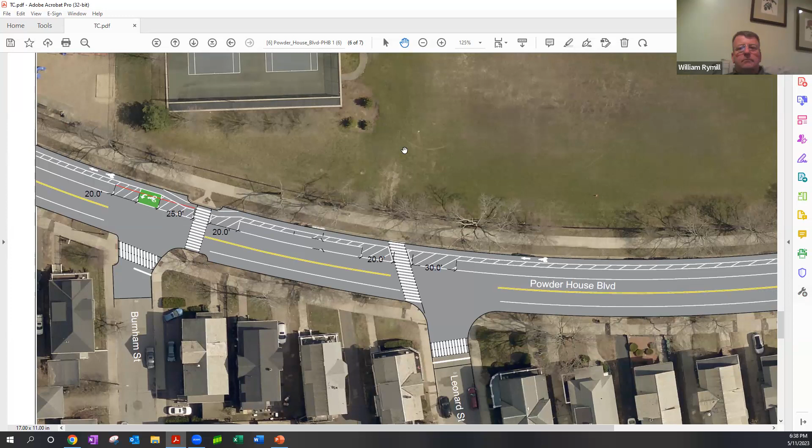In this location, we're asking for an additional 40 feet on the far side of this crosswalk, in addition to the 20-foot distance from the crosswalk. The primary reason for that is to add a bicycle box for left turns. Again, we have a very long stretch where the bike lane is behind parking, where there are no gaps to get out essentially. So this is to make sure that people who are biking can turn left onto Burnham Street, and it provides a space for them to wait. That impacts approximately 2 permanent parking spaces.

Moving on to the next item, regarding the curb on the north side of Powder House Boulevard opposite Mason Street, request to convert approximately 50 feet of permanent parking only to no parking anytime. That's this entire section here. There are no crosswalks here currently, so parking would normally be permitted along this entire section.

It's the same reason - to have a space for people biking, turning left, and we don't want parked cars right up against that space, because when someone is in the bike box waiting, we want them to be visible by traffic moving in each direction. That impacts approximately 2.5 parking spaces there.

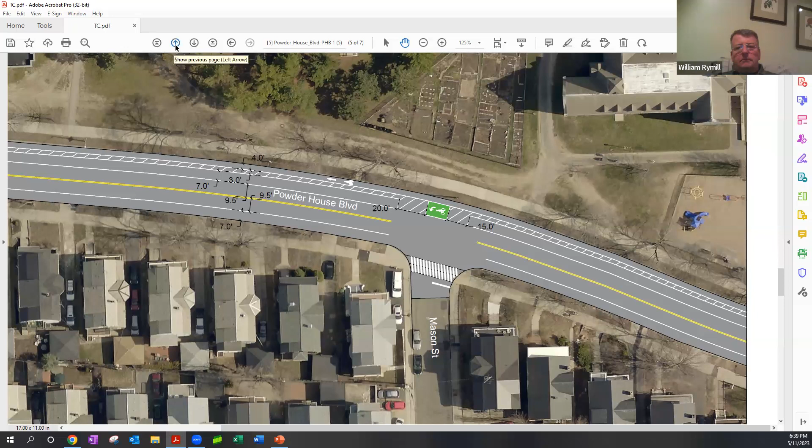Part D of this item is right up at Packard Ave. This is where the protected bike lane ends, and this is where it turns into sort of a standard bike lane next to a lane of parking.

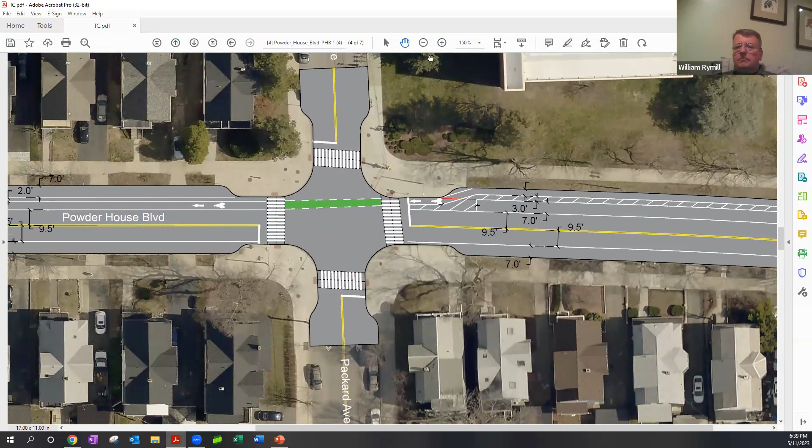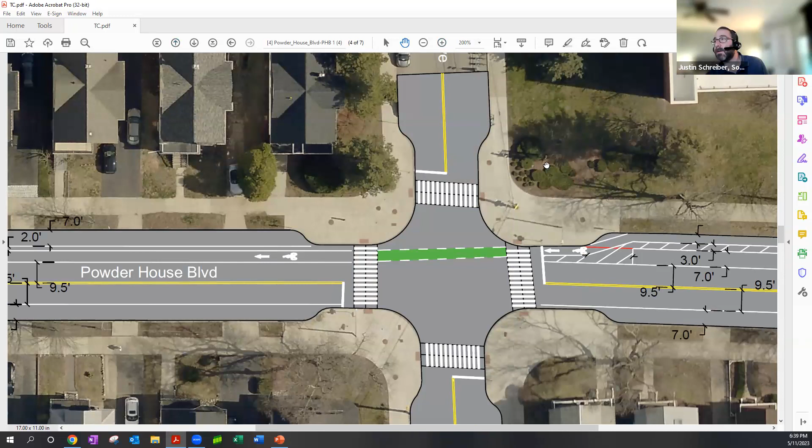This reads regarding the curb on the north side of Powder House Boulevard from approximately 40 feet east of Packard Ave to 50 feet east of Packard Ave.

Request to convert 10 feet of permanent parking only to no parking anytime. So the 10 feet we're talking about, zoom in a little more. This shadow is the no parking here at a corner sign. To make enough space for this bike lane transition, we're extending that another 10 feet to where you see the cutout for the parking lane. So today parking is permitted up to the sign, and the 10 feet is to extend it.

Again, on a stretch this long with no driveways or curb cuts on this side of the street, this really has minimal to no impact on parking capacity.

And that is it for item 6. Happy to take any questions.

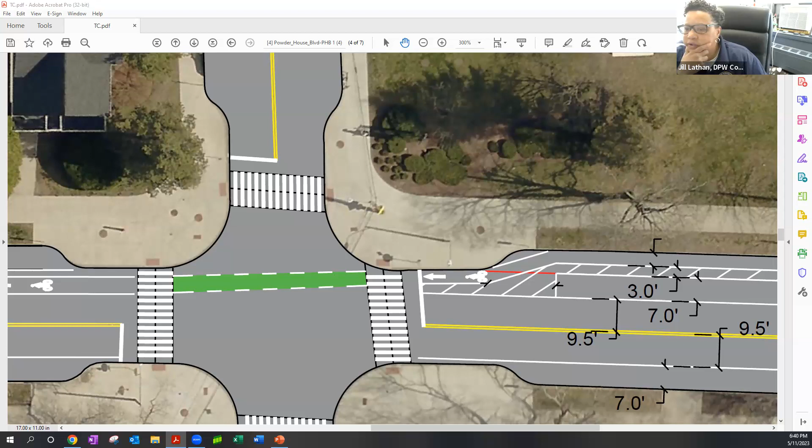Great. Discussions from the committee? So I have one question.

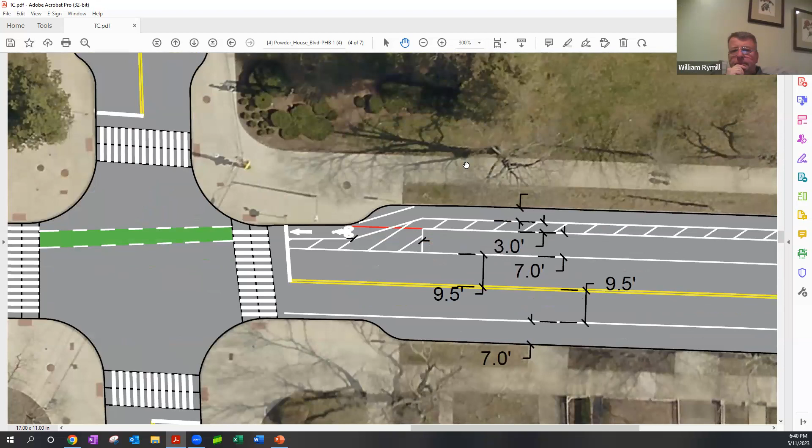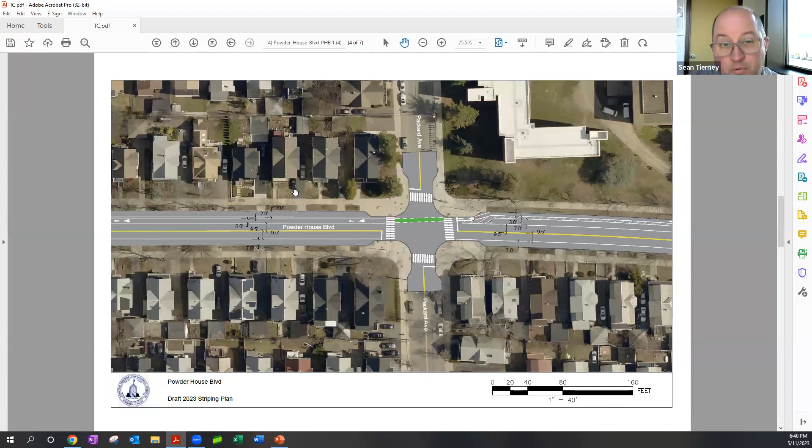It's not fire related, but is it necessary for the 2 left-hand turn lanes and giving up parking spaces for Burnham and Mason Street? Is there numbers to justify the number of people going up? Mason Street is, as you know, a pretty good hill. Are people really going up that hill versus going down Burnham, the next street over?

Just a thought. We don't have traffic data for bike left turns here. I think our thought is if there's a place where bikes can legally go left, that we should provide a way for them to do so. So that's what's reflected here.

And how many spaces do we give up by the 2 of those? This one is about 50 feet, so it's 2.5, I guess, but it depends how you measure. I think it's probably closer to 2, just because on a stretch this long of parking, people aren't necessarily parking nose to nose. So the extra 10 feet, we usually estimate approximately 20 feet per space. So it's between 2 and 3, but I think it's more likely 2 spaces.

And what's the distance between that left turn and the other one we made on Burnham? It's 1 block, probably about 300 feet or so. So in 300 feet, we're losing 5 spaces? 1, 2.

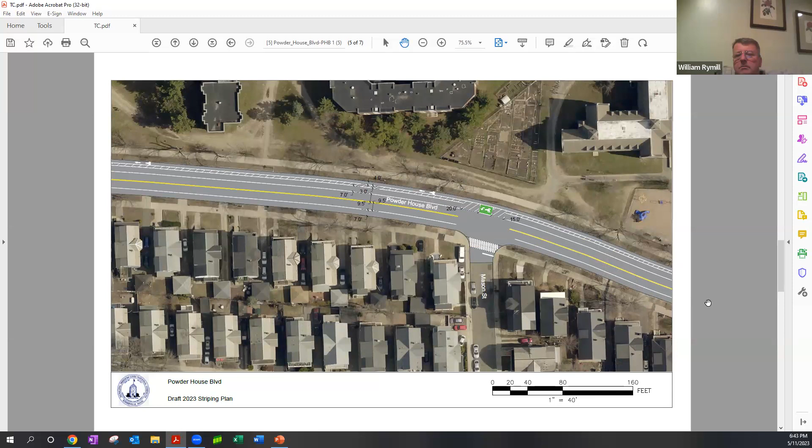Hi, Chair Lathan. Through you, just mostly a comment. I think it probably would be closer to 2 spaces, just because cars are really big and tall, and every time at every corner and intersection when the parking is restricted, and as I believe it is actually city policy for at least crosswalks, it's the same logic. That's a wide street, and if someone's going to make that left turn, you really don't want that person to be turning right in front of your vehicle, coming out of nowhere. I think a lot of the times it's like, oh, pedestrians and cyclists, people smaller than cars come out of nowhere, but a lot of that is because of that visibility issue. So I do support any time when a vulnerable road user like a pedestrian or a cyclist is going to be hopping out from behind large parked cars, that it makes sense to have a little bit of space so that they're visible. So I do see the logic there, and I feel like it's a reasonable amount of space to give to that safety feature.

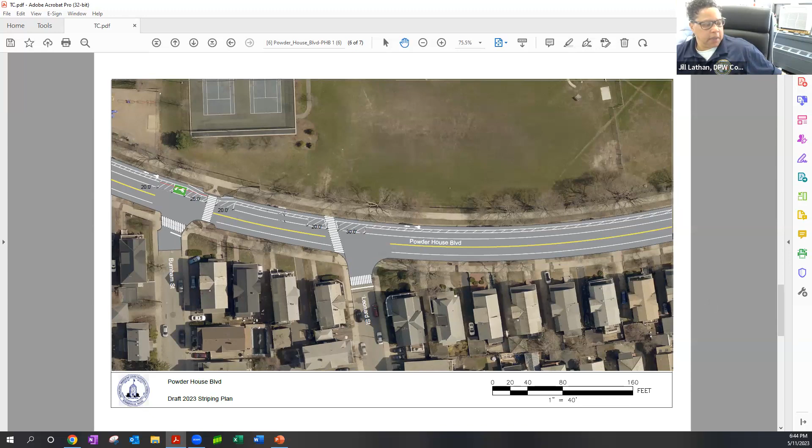Any further discussion? Hearing none, may I get a motion to accept or reject item number 6, A, B, C, and D?

I'll make a motion to accept. May I get a second? Timmy? Sean, can I get a second? How about you, Lieutenant Rymill? Can I get a second? All righty, all right, cool. Wonderful.

Roll call vote, please, to approve item number 6. Councilor Gomez Moacad, yes. Lena Webb, yes. Lieutenant Rymill, yes. Deputy Chief Tierney, yes. That's 4 yes and 1 abstain, and the motion carries.

All righty, moving on to item number 7. This is a marathon one for us tonight, committee members. East Broadway bus lanes and crosswalk improvements, A, B, C, D, E, F.

This seems to go on further. The Broadway South Side, McGrath Highway to Mount Vernon Street, that's G, H, I, J, K, L, M, N, O, P, Q. And on to Cross Street, north of Broadway, R, and Franklin Street, south of Broadway, S and T. I'm kind of disappointed we're not getting to Z this evening.

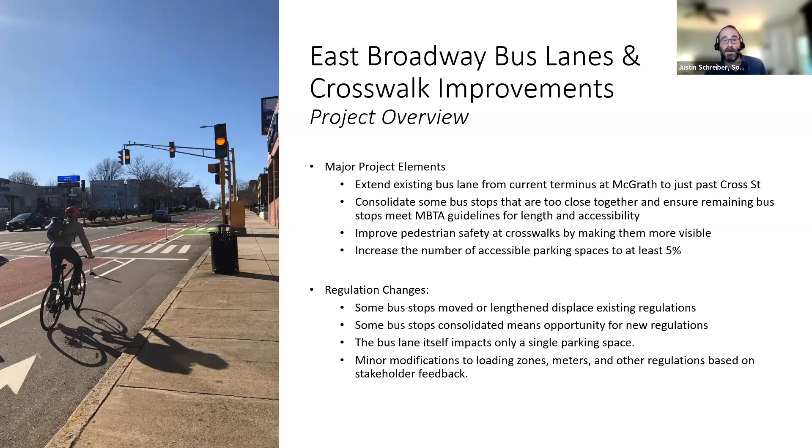And then, based on the feedback we've heard from residents and businesses along East Broadway, there are changes to loading zone meters and other regulations based on that feedback. So the main thrust here is the bus lane, but it's also an opportunity to make sure things are working well for the business district as well.

Here's a quick overview of the bus stop changes. The pair at Cross Street East: the westbound bus stop heading away from Sullivan Square will remain the same, though a little longer. The eastbound location heading towards Sullivan Square in front of Joe's Liquors will be moved a bit further upstream on Broadway between Cross and Autumn Street.

At Indiana Ave and Michigan Ave, the two westbound bus stops heading away from Sullivan Square will be consolidated to a single, more centrally located stop at Illinois Ave. At Glen Street and Franklin Street, the two eastbound stops heading towards Sullivan will be consolidated to a more centrally located stop across from the East Branch Library on the far side of Glen Street. Finally, the MacArthur Street and Kensington Ave pair is proposed to be removed entirely, as they would end up extremely close to other bus stops here.

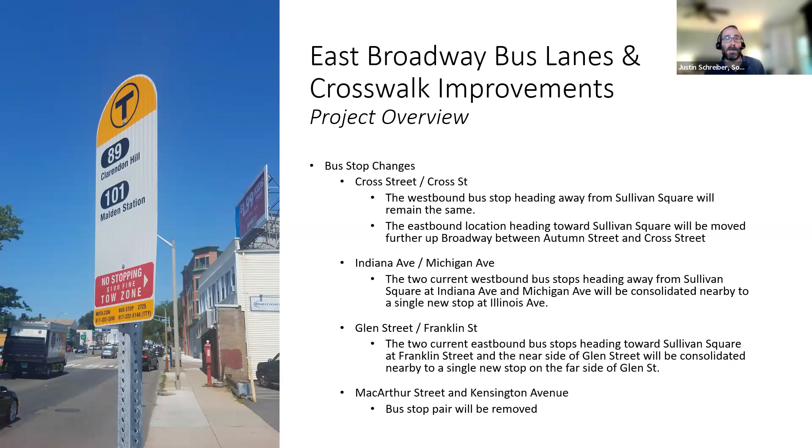A little bit about the outreach we've completed so far. We've had 3 on-street pop-up events: at Broadway and Cross Street on March 30th, at the Somerville Community School, and at Broadway at Franklin Street. We estimate we spoke to over 200 people at those 3 events.

We also had virtual office hours, not as well attended, but two chances for folks less comfortable talking in person or who wanted a one-on-one with a city staffer, on March 28th and March 19th. We've been partnering with Somerville staff to speak different languages when talking to East Broadway businesses, particularly important in East Somerville. We've had assistance from East Somerville Main Streets and Economic Development in getting the word out to different businesses.

Our digital and print outreach materials are available in all of our most commonly spoken languages in Somerville, and we also did direct flyering to residences near the bus lane itself. We've established a project website, again available in 6 languages, and are getting the word out through various newsletters and social media accounts.

A couple more things we'd like to do, assuming a positive vote tonight, as we pivot toward implementation. We have individualized flyers for each bus stop that's changing to show people where they need to go, relying on pictures so it's understandable by many different people.

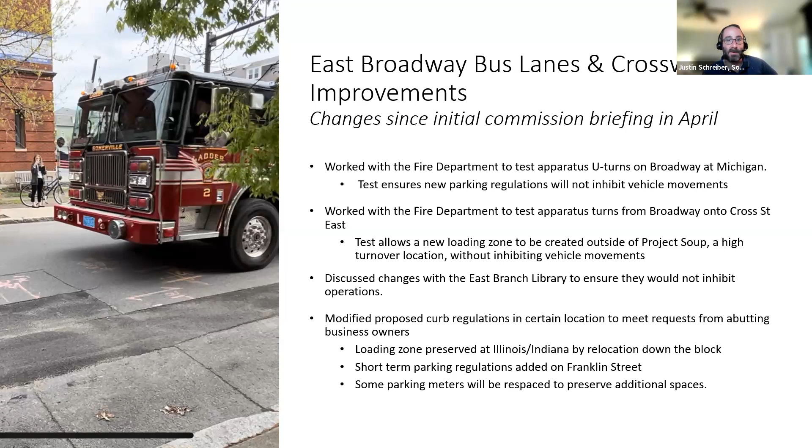Quick illustrative overview of the bus lane. Essentially we're taking that secondary travel lane between McGrath and Cross Street and reserving it for the bus in both directions. Parking is to the right of that bus lane, the other travel lane is to the left, and we're preserving all of the left turn lanes that exist today. After approximately Rush Street, the bus lane ends and merges into a single travel lane on Broadway.

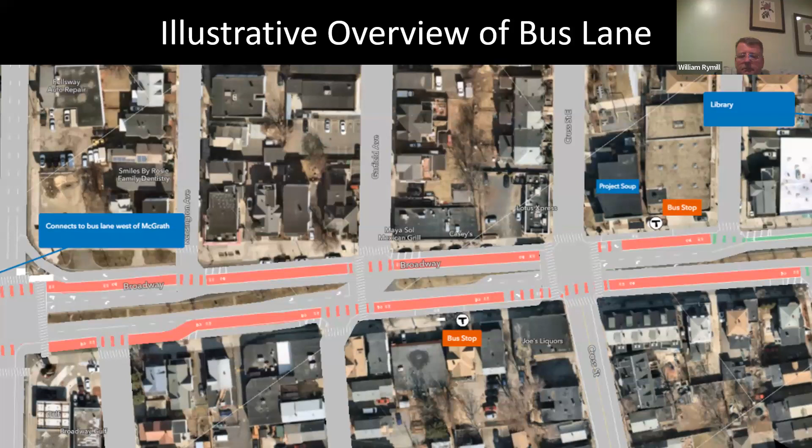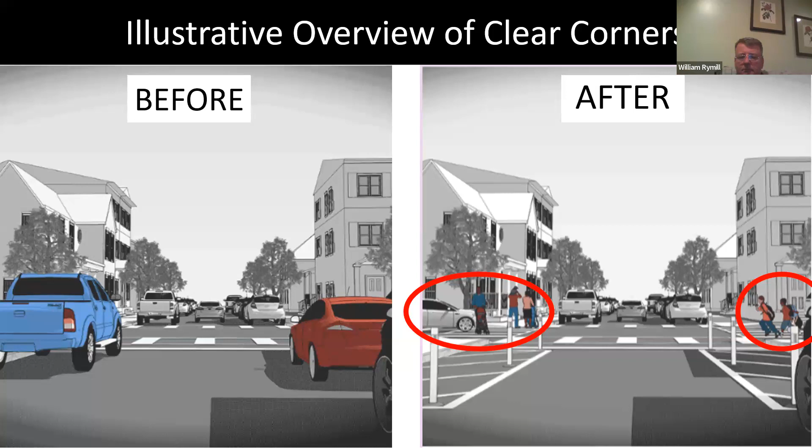Just a quick overview of the clear corners piece, which we're doing at the same time. This is enforcing the no parking within 20 feet of an intersection or crosswalk. On the left, those cars are parked right up at the stop line, hiding people crossing the street and other vehicles trying to make turns.

So I'm happy to get into the details, but I'm willing to pause here in case there are any questions, or I can keep going right into each of these. And yes, there's quite a few. Any questions before we go through the alphabet on this? All right, go ahead, Justin.

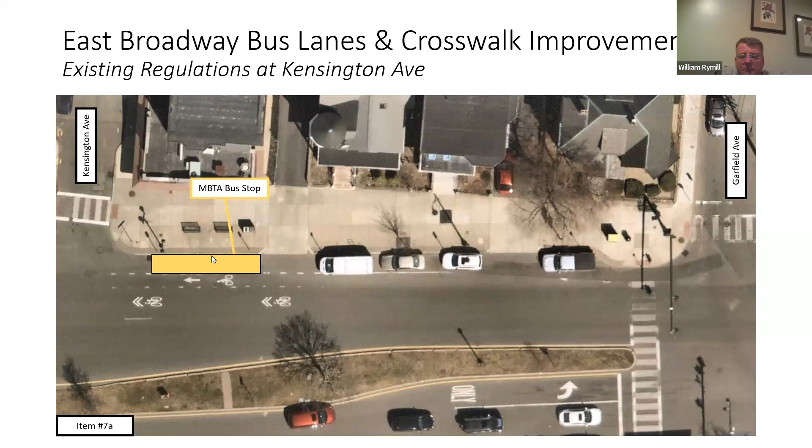First, item A: this is the bus stop at Kensington Ave in front of Louis, former Louis. This is the existing regulations with the MBTA bus stop, and we're proposing to extend the 2-hour parking except by permit. I also noted the no parking anytime regulations - that's not part of this agenda item, just there so you're aware of why this green box isn't longer. So it's just the rest of the block is 2-hour except by permit, extending that and adding an additional single parking space here where the bus stop used to be.

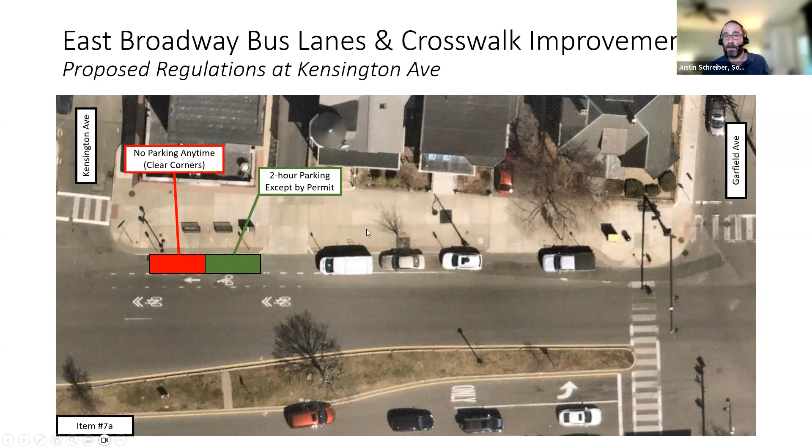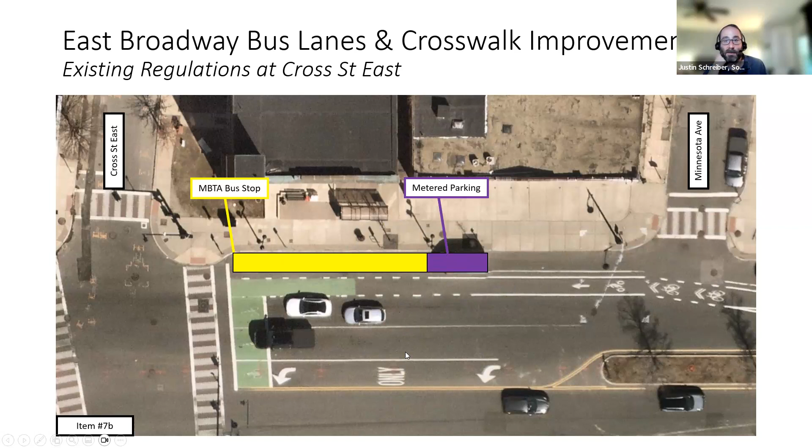I'll just keep going unless someone raises their hand, or chair, feel free to stop me any time. This is the bus stop in front of Project Soup at Cross Street East. This bus stop is particularly problematic because the bus really cannot reach the curb - it needs about 14 feet in front of this curb extension to get out. When people are parked in this metered parking space, the bus usually isn't able to reach the curb, and that's a problem because people have to step into the street, and people with disabilities can't use the ramp that deploys off the bus. So we're asking to extend that bus stop and displace that single parking meter there. That's item 7B.

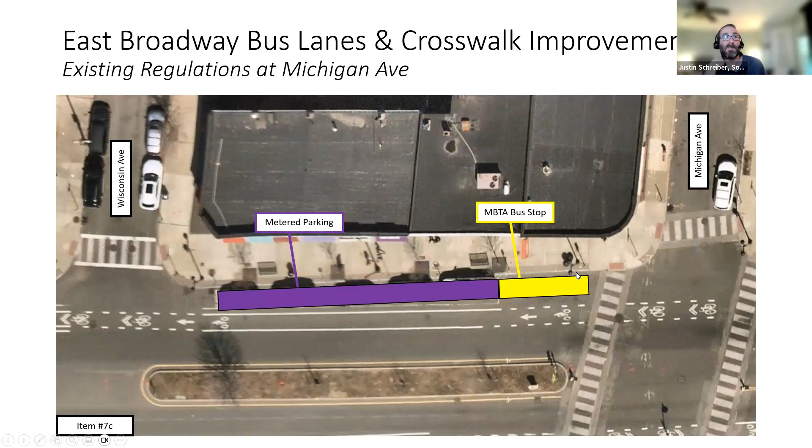Item 7C is at Michigan Ave. This is a bus stop that's going to be consolidated and moved to the other side of the East Branch Library. So the request here is to extend the metered parking regulation, and then we have the 20-foot distance from the crosswalk - although it's only 10 feet, we think we can respace these parking meters and add an additional parking meter along this stretch. That's item 7C.

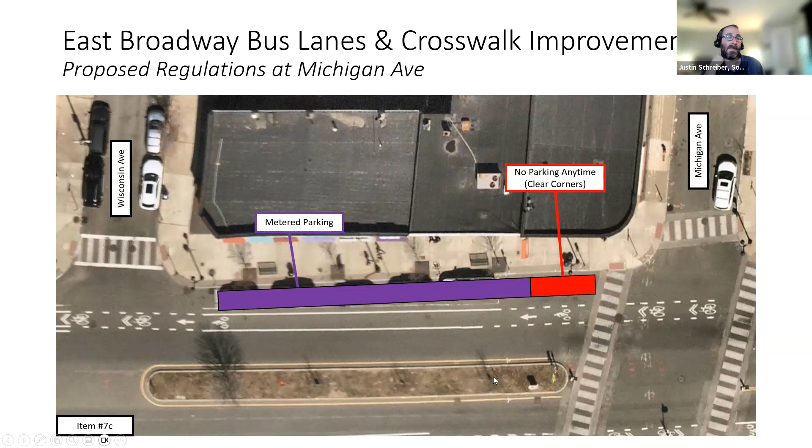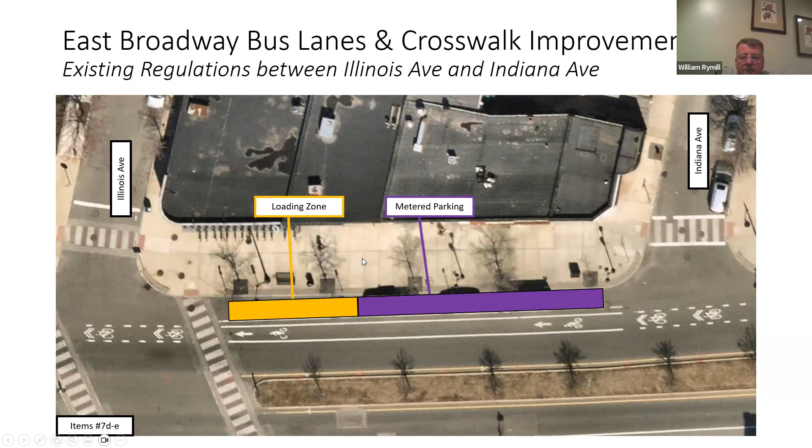Items 7D and E are where that bus stop we were just discussing is being relocated to - in front of Rincon between Indiana Ave and Illinois Ave. We have a loading zone and meter parking today, and the request is for an MBTA bus stop. In working with these businesses, it was more important to retain the loading zone, so we've relocated that loading zone to the other end of the block.

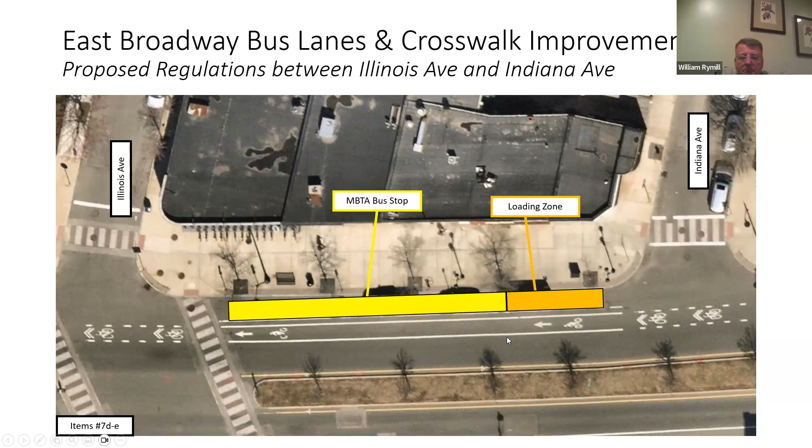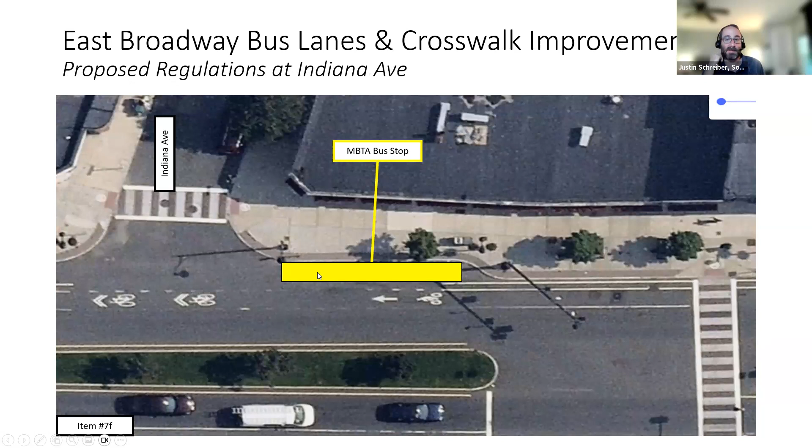This is just on the other side of Indiana Ave. We have a bus stop on the far side of Indiana Ave. This bus stop would be extremely close to the next bus stop, so we're proposing to remove it and add metered parking in that location.

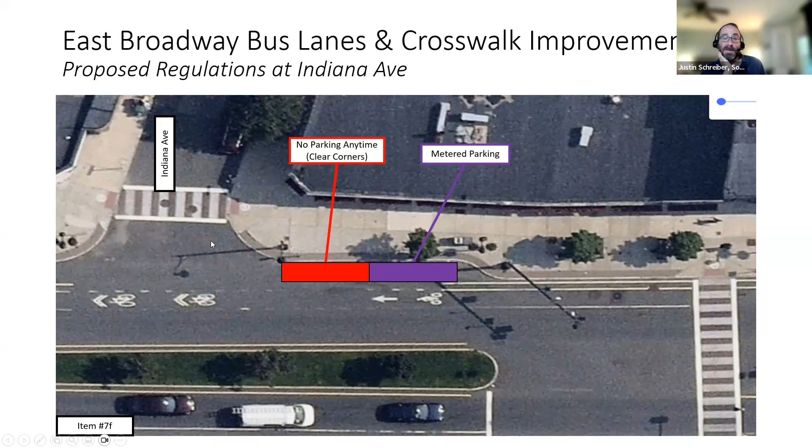So we've just traveled along the north side of Broadway, and now we're going back over to McGrath on the south side of Broadway. We are just after MacArthur Street, which is the one right after McGrath, after the gas station there.

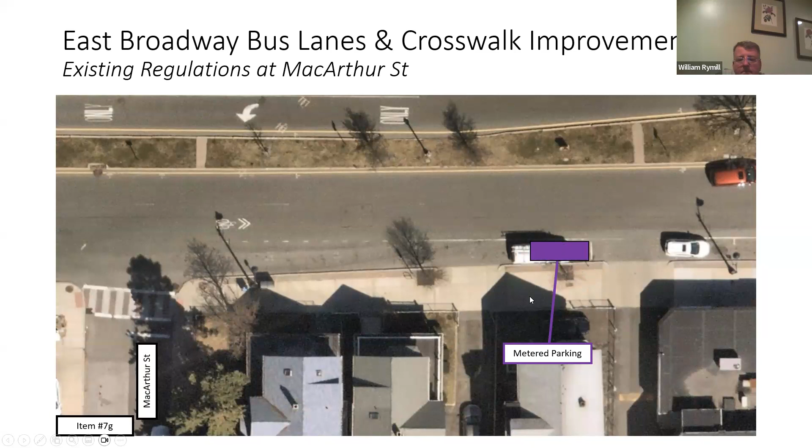This is the single parking space that is impacted by the bus lane. It's metered parking today; we're asking for it to be no parking anytime. At the intersection with McGrath, it's a 3-lane cross section, so there are 2 travel lanes that come over to this side, and there's the bus lane. We're merging those 2 travel lanes into one, and the bus lane is going to come off the curb and join into that second travel lane. It's just not quite enough room to get the bus over without removing a single parking space. So that's item 7G.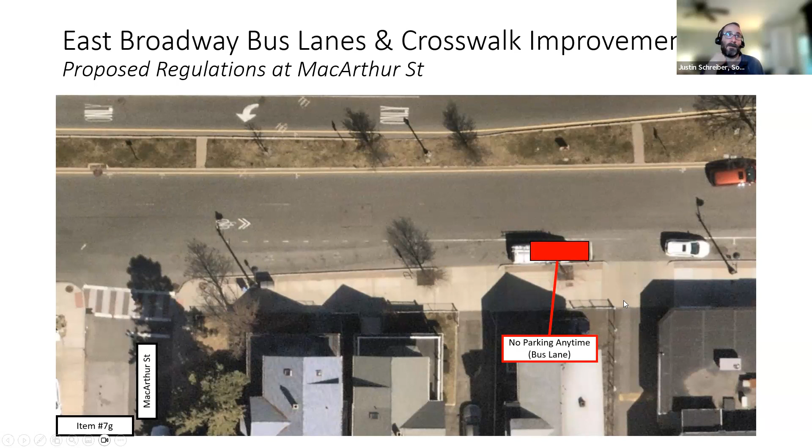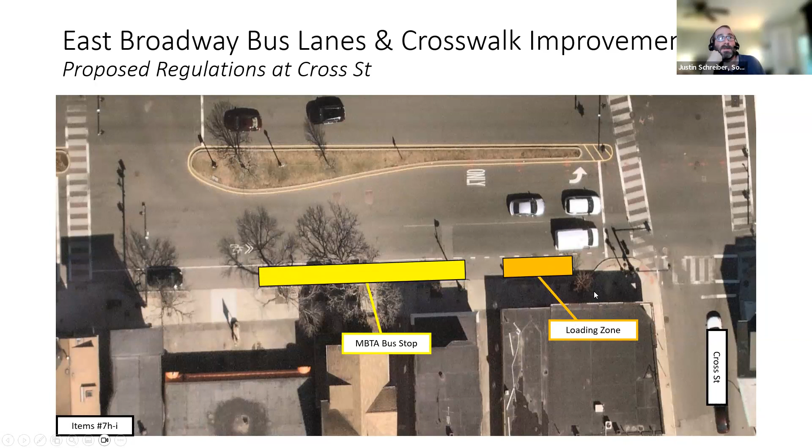The next one is up at Cross Street. This is item 7H and I. In this location, we have the bus stop in front of Joe's Liquors, and there's a bank of metered parking behind that. This might be the worst bus stop on this entire project. The bus has no way to get to the sidewalk here. It often actually loads up at the intersection in the curb extension. This is a 35-foot bus stop, which really the bus has no way to actually reach the curb. So we're proposing moving the bus stop back, giving it a little more space. And in talking with Joe's Liquors, there was a desire for a loading zone in front there, so we're establishing a new loading zone there.

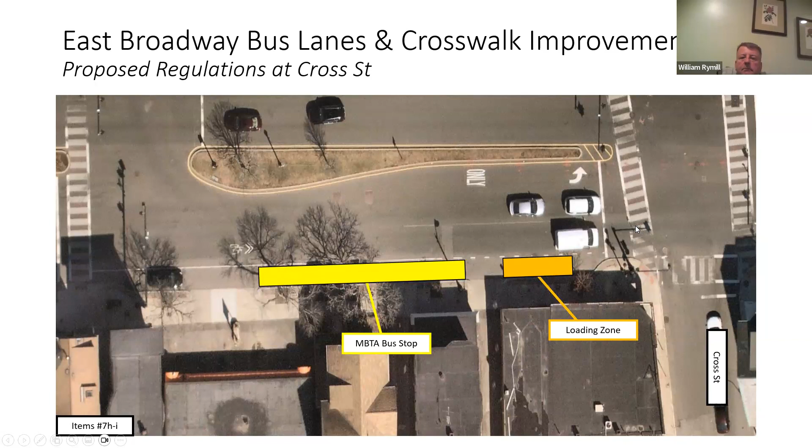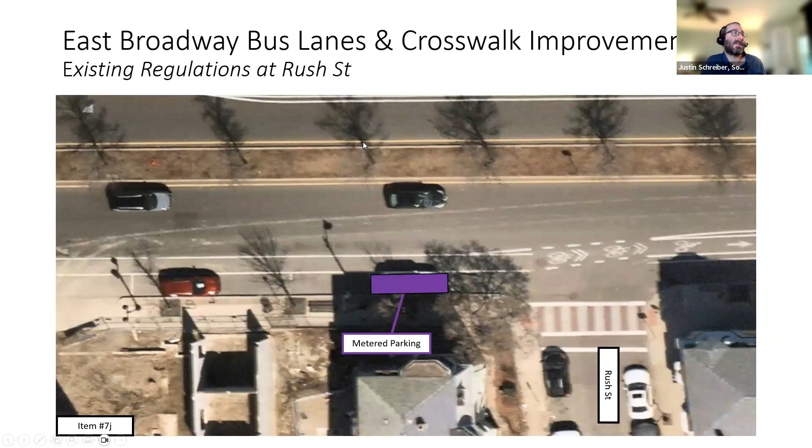Moving down the corridor toward Sullivan Square, this is at Rush Street. This is a request for item 7J to take a single metered parking space and add an accessible parking space. This is one of 3 accessible parking spaces we're adding. This location is near some businesses, and importantly, it's near a curb cut to be able to get a wheelchair onto the sidewalk.

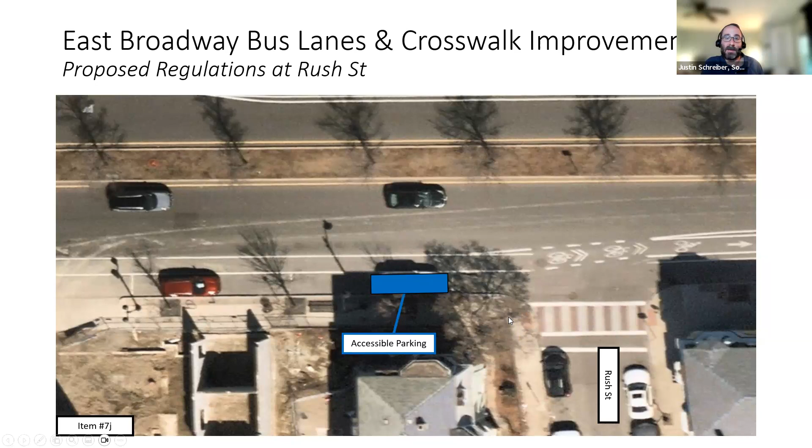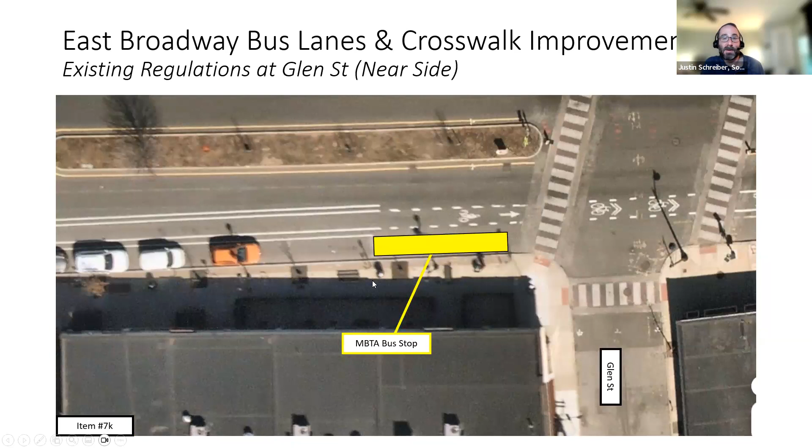Item 7K, this is the bus stop in front of La Brasa on the near side of Glen Street. Another bus stop that's entirely too short, and the bus has a real hard time getting to the curb. We're proposing to remove it, relocate it, and add metered parking. I've also shown the 20-foot distance from the crosswalk where parking is not permitted.

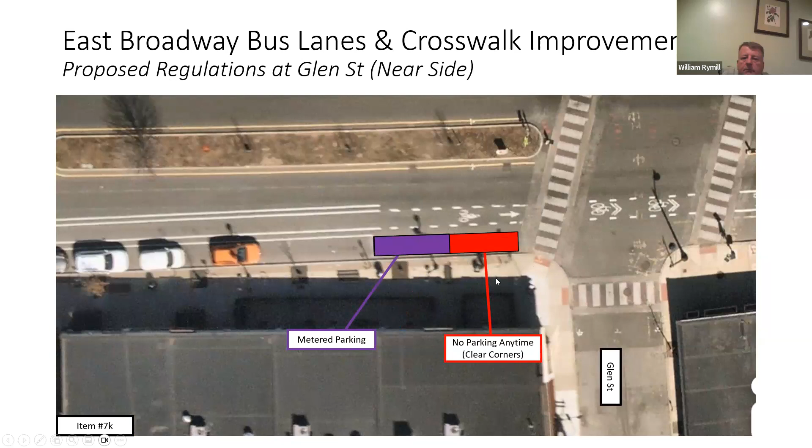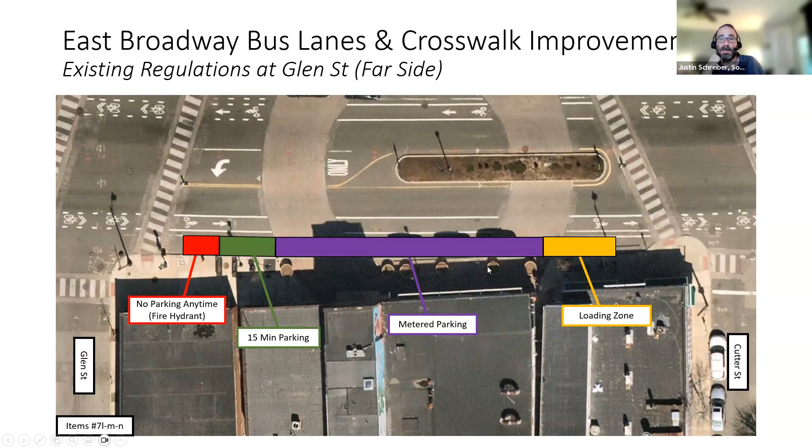This is just the next block between Glen and Cutter. This is where we're proposing to move that bus stop; we just removed 2. Today we have a fire hydrant, 15-minute parking, metered parking, and a loading zone. There's a couple things going on here. We have Ola Cafe, so short-term parking is important to them. We also have the laundromat, which has its own parking lot, but still short-term parking is important to them. And then Gaucho's Restaurant, which has outdoor dining that for most of the year occupies this loading zone. So the request here is to relocate that bus stop. We're putting a loading zone mid-block so it can be used by folks going to Ola Cafe or the laundromat. The rest of the block is proposed to be metered parking, although in the warmer months, 2 or 3 of those spaces get used by Gaucho's outdoor dining parklet.

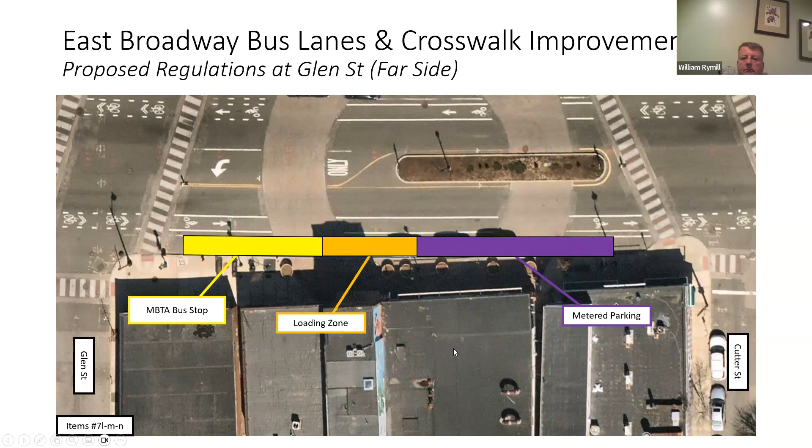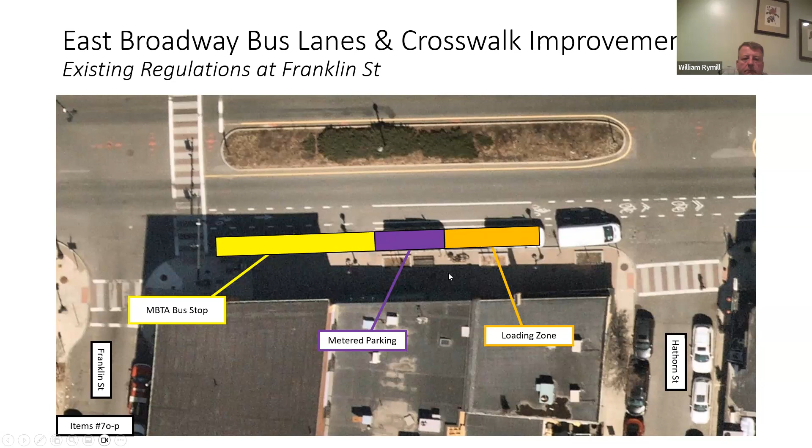Items 7, O, and P: again moving down the corridor, this is just past Franklin Street. This is a bus stop we're proposing to consolidate, so to remove. We're going to extend the other regulations on this block and add a second accessible parking space. So here are the proposed regulations: an accessible parking space right next to the crosswalk, a pair of parking meters, and a 40-foot loading zone.

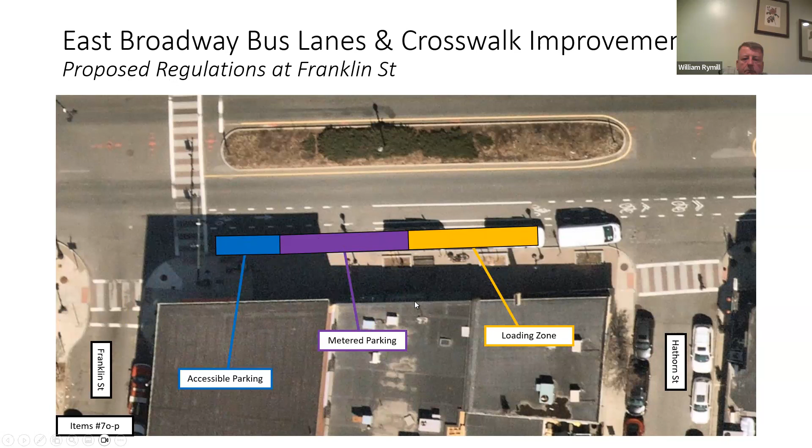We're almost done, I promise. We're here past George Street. This is the last location where we're proposing adding a 3rd accessible parking space, spacing them out along the block. The other 3 that exist today are on the north side, so the 3 we're adding to get to 5% are on the south side. This is the 3rd accessible parking space.

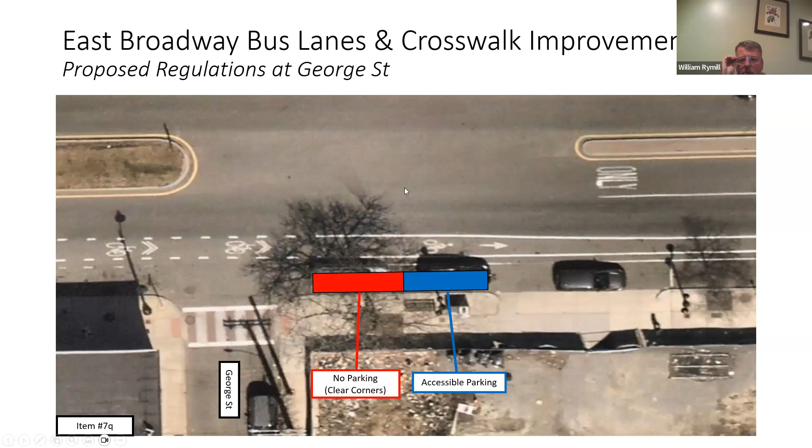And then there's 2 changes on side streets. So we're now looking at Cross Street East here, and Broadway is to the left of the screen, going up and down. This is the location where we were able to work with the deputy chief to shorten this no parking anytime regulation, and then add a loading zone and replace one permit parking space with a loading zone.

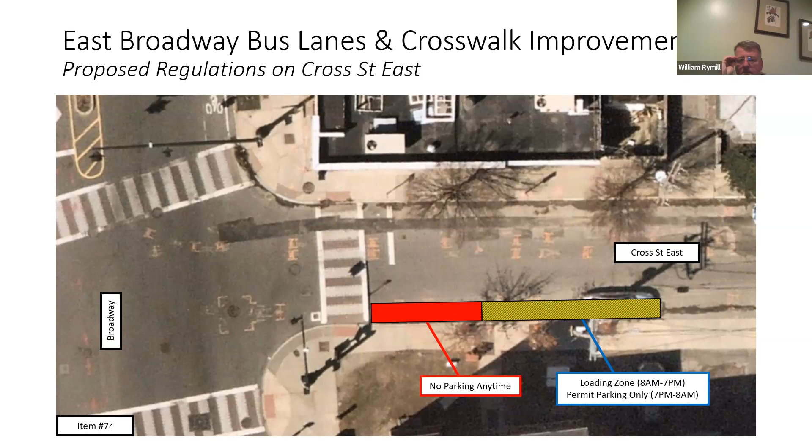So this loading zone will be in effect 8 a.m. to 7 p.m., and it'll be permit parking only overnight. This is Project Soup right here, the food pantry, and there's a lot of turnover, a lot of green cab taxis coming here.

So, providing a space for that sort of short-term activity was important. And then, finally, in response to some of the requests for additional short-term parking on side streets, and also to replace some of the parking meters that were displaced on Broadway for loading zones or other regulations, items 7S and T are requests to take 2 spaces on either side of Franklin Street at Broadway and make them a pair of metered parking spaces on each side of the street.

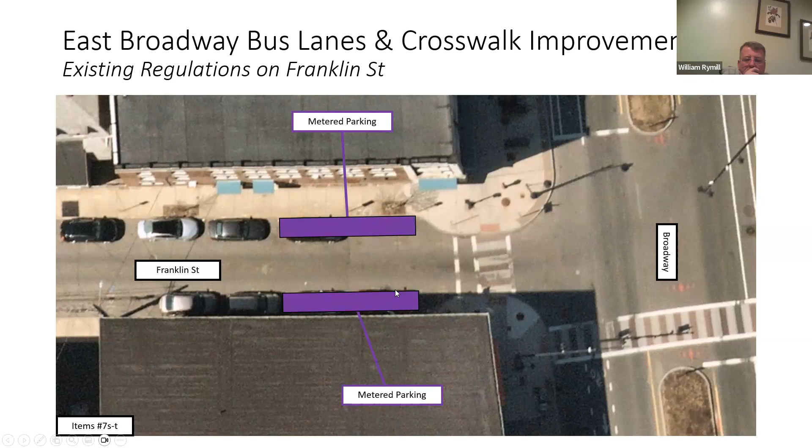All right, that was a lot, I know, so I'm happy to answer any questions that you all have. Questions, concerns from the committee?

Well, I just like to say that I am very proud and happy about the due diligence and the hard work that the transportation team is doing throughout the city to provide safer streets for our pedestrians, for our bikers, for our buses, for really attending to our most vulnerable populations and doing some really incredible street design. I really appreciate the presentation. I appreciate the hard work that you guys have done throughout the year, coming before this committee.

Somerville is really, in my opinion, really trying hard to make sure that people can travel safely in our community. So I just wanted to thank you, Justin, and the whole transportation team and mobility team for really paying close attention and actually caring about Somerville. Thank you, Chair. Appreciate that.

I second that. Well, yes, wholeheartedly. And we have a third. I third that too. And I do want to also comment that in the past, I appreciate you working with the businesses too. Because part of safety is trying to understand their loading zones, where they're putting things. And I know it's going to take time. It's not perfect. As I was riding my bike to MGH today, I bumped into trucks and bikes, like 2 or 3, but we'll get there.